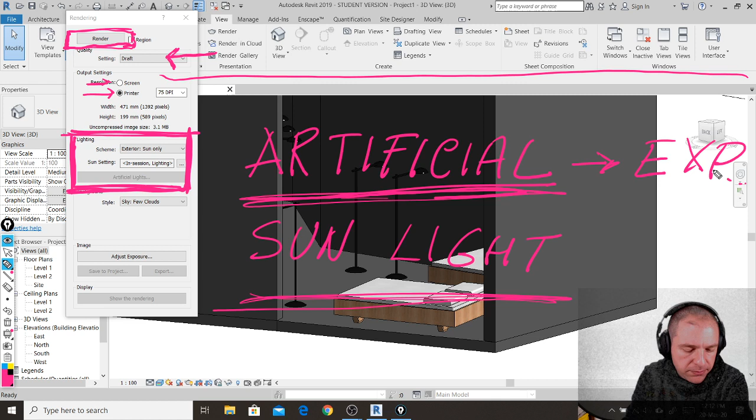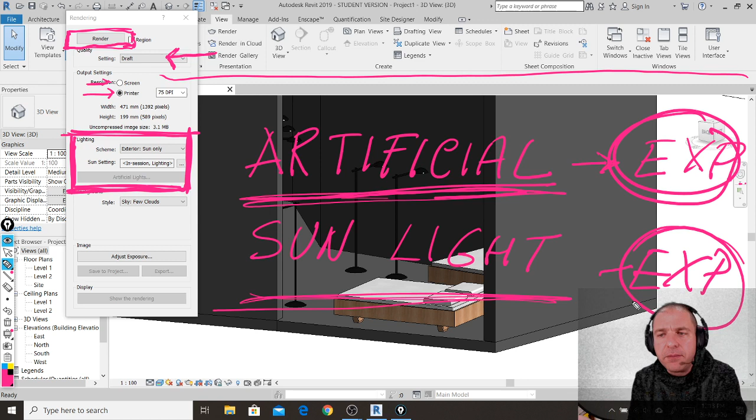When we make renderings, and because all of you have already seen 3ds Max rendering, you know that in 3ds Max you can use artificial or sunlight. But where is the problem? The problem is that each time we use artificial light sources in combination with sunlight, we need to change the exposure value. It's a pretty common problem if you remember using 3ds Max: when you have artificial light, then you put the sunlight, and renderings are super bright. So then you change the exposure, and then you remove sunlight, and suddenly the rendering remains black. And again, it is so annoying, you have to change the exposure again and again. And what is unbelievably complex in 3ds Max is that if you want to use artificial and sunlight together at the same time, it becomes so complex to find the balance between exposure and intensity of light and this and that. It becomes a gigantic mess.

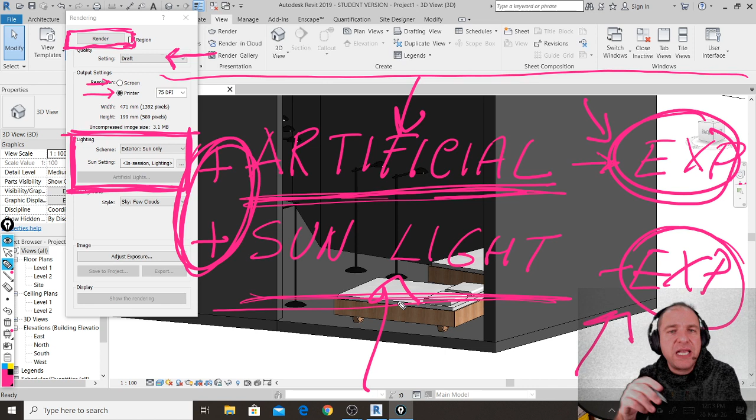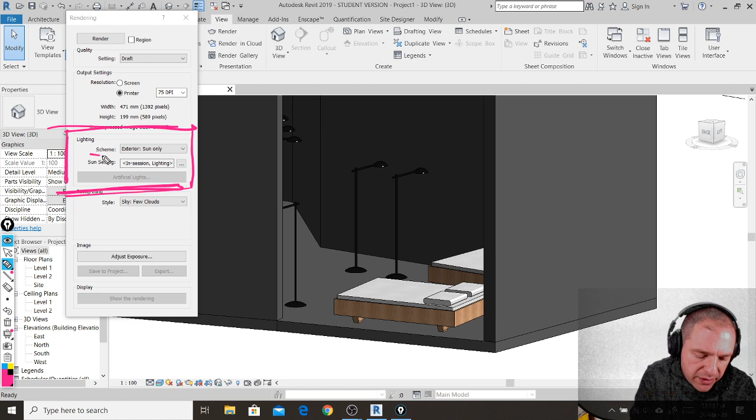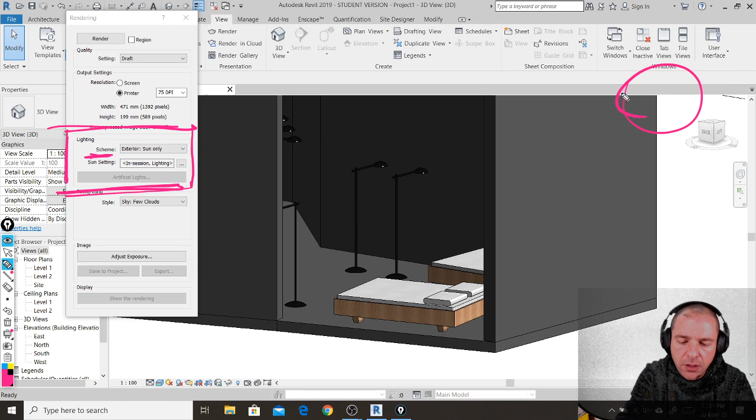So see why instead in Revit, making rendering is not the best, is not the most beautiful quality ever seen, but it is so simple. Because when you see this part here of the menu, and you see this one that is the scheme, you can easily set your lighting scheme in this way. Look, you can say exterior sun only. What this simple parameter means, what this includes in one parameter only, is that in this way my rendering will be by having only sunlight turned on, shining, and the exposure will be correctly set according to this light source. And the exposure will also be correctly set, like I am doing an exterior rendering, so a view from the outside. So first thing first, I can click here and I will find six different combinations of available light sources and exposure adjustments that are preset.

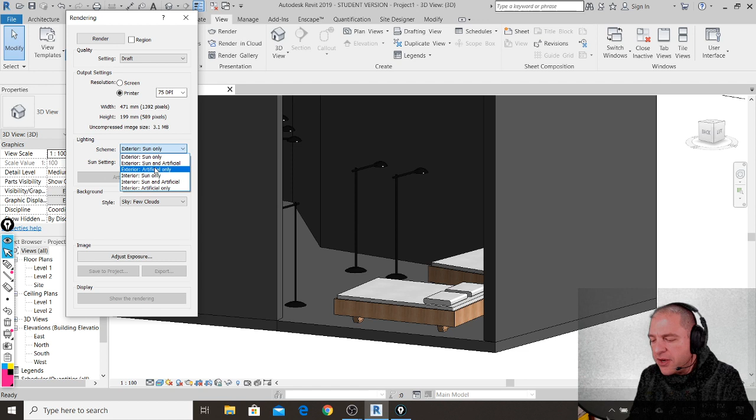So I can use sun only for exterior. Revit will turn on the sun only, it will keep artificial lights turned off, and it will set the exposure for exterior. I can use exterior sun and artificial: if I'm making an exterior scene and I can turn on lights, I can turn on the sun, and Revit will set the exposure for this light combination. As well as, if I choose exterior artificial only, the sun will be turned off and only artificial lights will be turned on, but the exposure will be set for those lights.

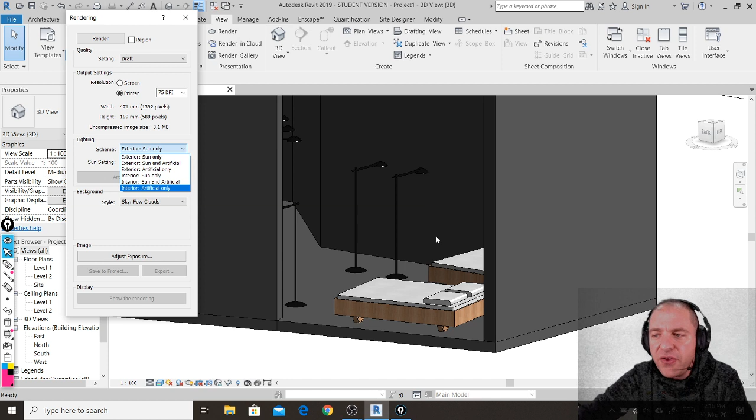And same thing for interior. So I can set exposure for interior, turn on the sun only. Exposure for interior, turn on the sun and artificial. Exposure for interior, and turning on artificial light only. So this is clearly an interior scene. What I will do is just show you that lights are components that have not only a light fixture, but also a light bulb, so the light source.

I will set my lighting scheme to interior, artificial only. I don't want to see the effect of the sun either. So basically this is like making a nighttime rendering. If I click the button now that is called render, hoping that it won't freeze, you should see the rendering of this view, showing that the light fixtures are also projecting light. Let's click render and see what happens.

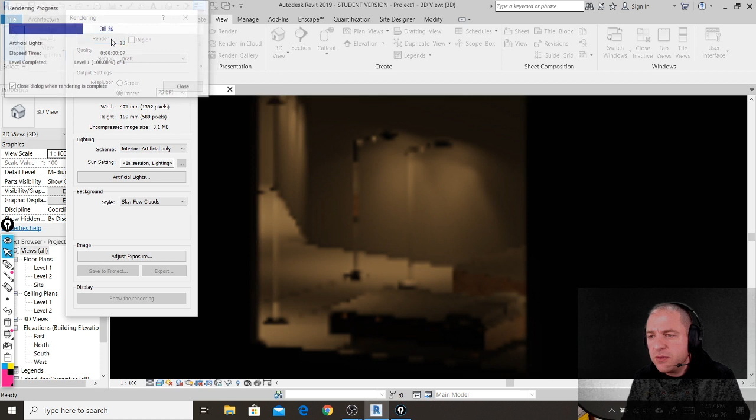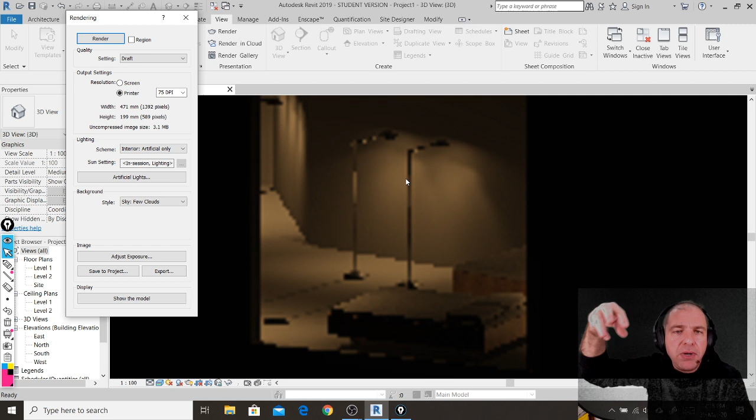Oh, fantastic. Well, it's not that fantastic, simply because I have set my quality to draft just to make a quick preview. But this proves that these lights are not only 3D models, like the block of the light, they also have light projection.

And why is this so important? Look, this is important because, like all other objects in Revit, even components have parameters. But components are a bit more complex to manage simply because they don't always have the same parameters. If I have a bed, it will have certain parameters. If I find a table, it will have other parameters. If I use a chair, it will have other parameters.

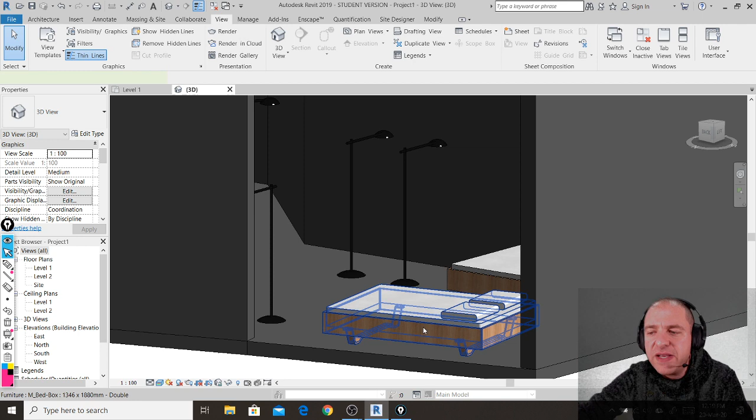Just to show you, if I select a bed and click edit type, I will find certain parameters like materials, dimensions, and then identity data, where basically if I want I can write the brand, the price, and other things. But what's important is that if I click edit type and edit a component that is a light...

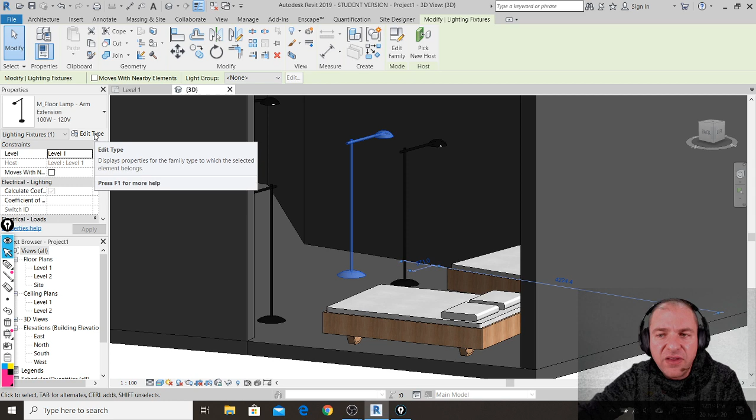In edit type, in all light sources, I will find not only generic parameters like materials and so on, but in all different lights, if I scroll, I will always find, and this is true for all light objects, a specific area of parameters that is called photometrics.

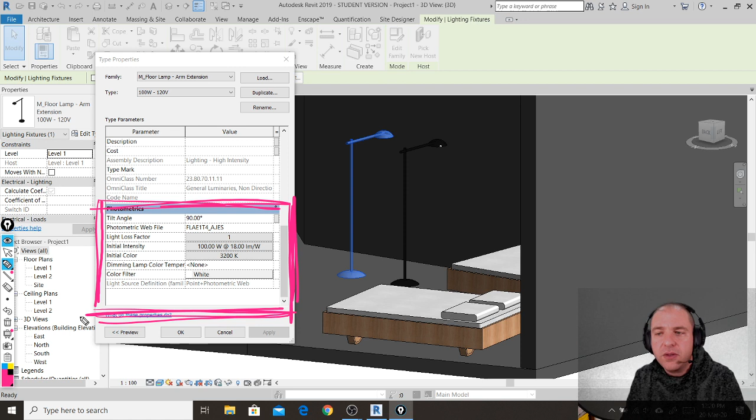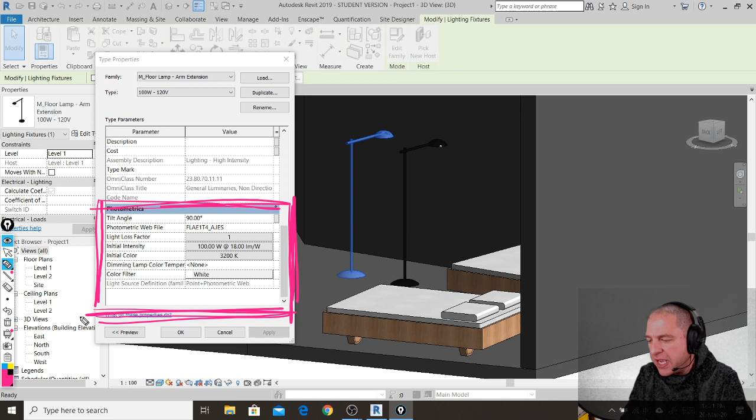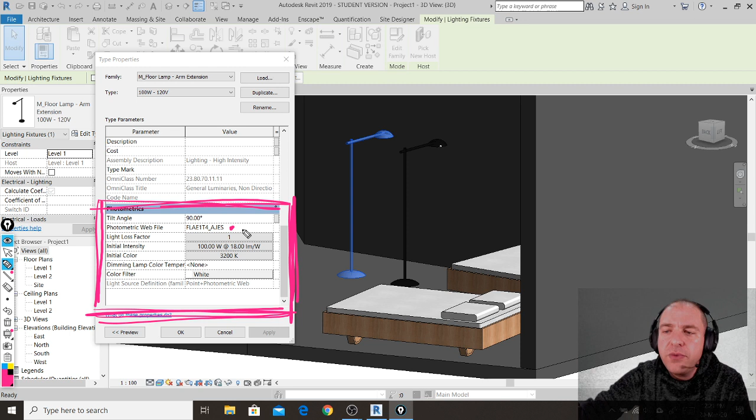And believe it or not, photometrics are exactly the same light parameters that we studied in 3ds Max. So basically, yes, it is an IES file. Each light has an IES file preloaded, and you can find it here. This is the name of the IES file managing this particular light. But not only can you load the IES file, to make your life easier, you can also click these buttons.

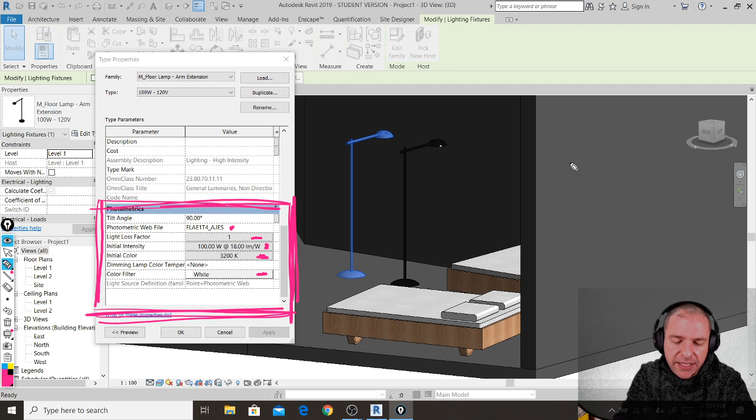Do you remember the parameters of photometric lights we saw in 3ds Max? We mainly saw intensity, and we saw color, and here you can change them as you wish. So my rendering was pretty yellow and also really dark. Why? Simply because the initial parameters of these lamps have very small intensity and a color of 3200 Kelvin, which is a pretty yellowish color.

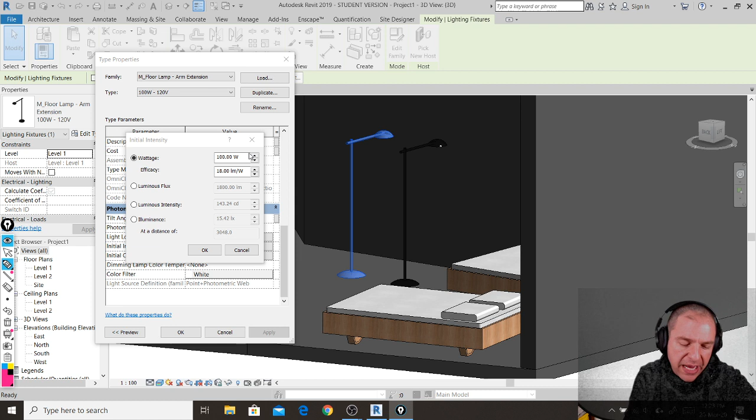So what I will do is click intensity, and I can increase it. And if I'm more familiar with 3ds Max parameters, I can also use 3ds Max units. In 3ds Max, if you remember, we were using not watts, but lumens or candelas. So if I want, I click luminous flux, and let's say I make it, I don't know, 4,000 lumens.

LM is if you know the intensity of light in lumens. CD is if you know the intensity of light in candelas.

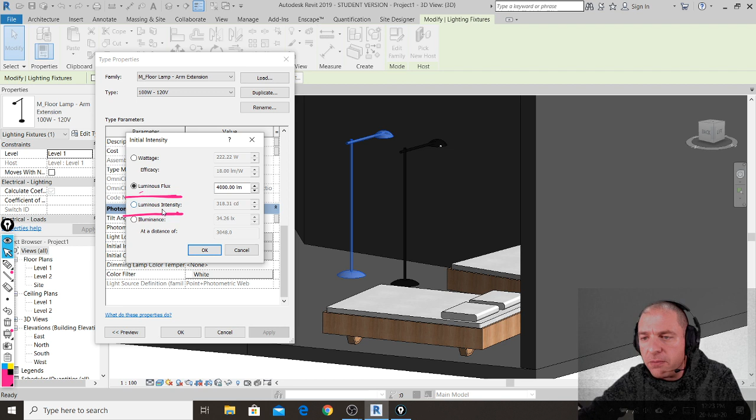Yes, I'm so sorry, I was faster. I've read your message before you were able to delete it.

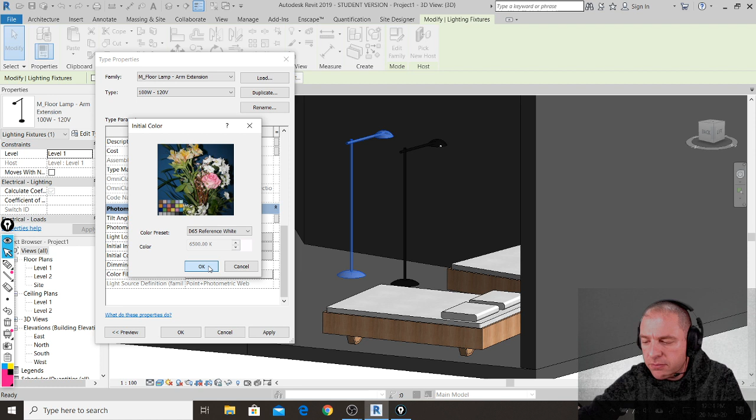And also, we can change the color. So instead of this yellowish tone, I can make it like D65, which would be pure white. Then I click OK.

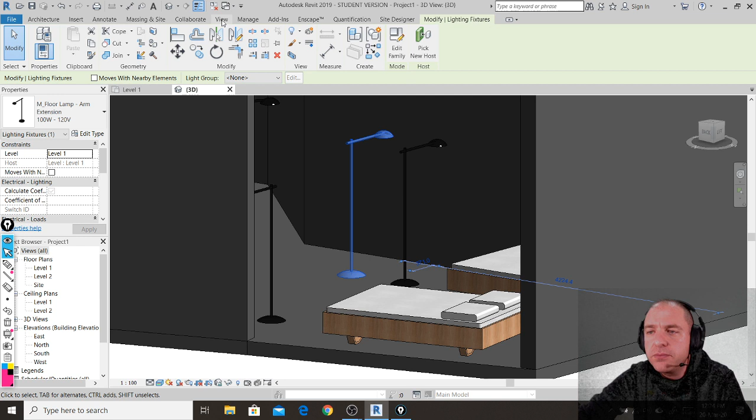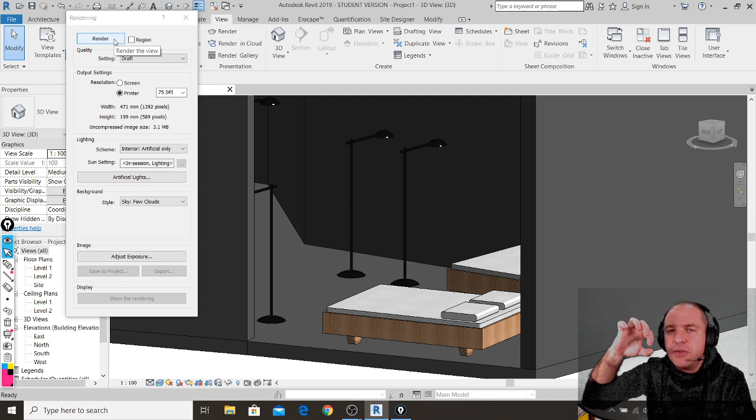Just to check that we can manage lights like we did in 3ds Max, let's see what happens if I go to View, then click Render. As you can see, my render settings are still there, so I don't have to change them each time. But if I click Render, instead of that yellowish, very dark image, I should have a more white and slightly brighter result. Let's see if it's true.

Fantastic. Look at that, that's too cool to be true. Don't mind the quality. It's so pixelated simply because I'm keeping the quality on draft just to avoid waiting minutes to see the result. So the fact that all shapes are not sharp depends only on this.

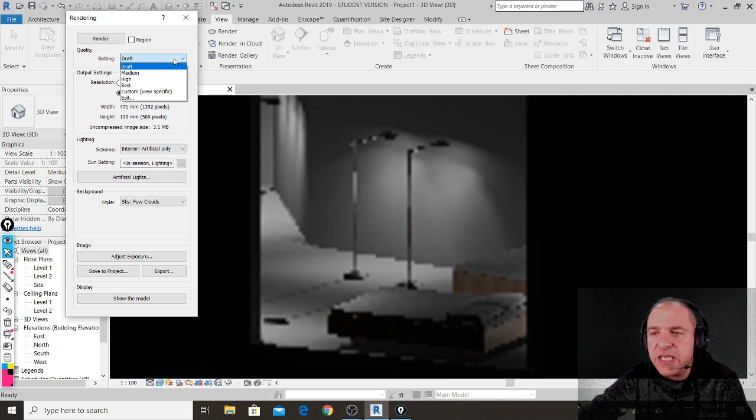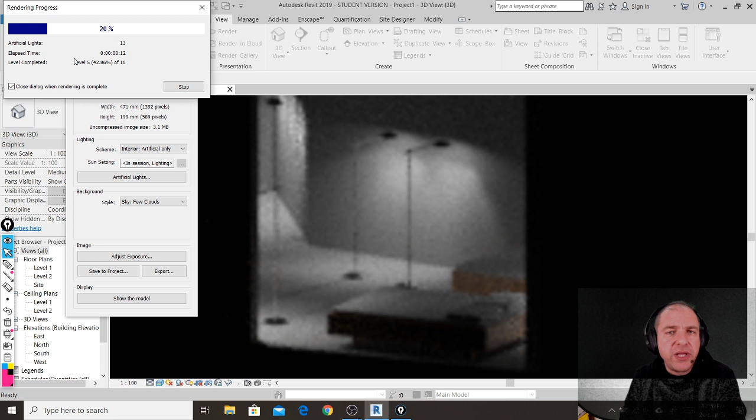If you just want to see, you can go to render high and render again - it takes a little extra time, but you'll see that the rendering is a lot sharper. But this is not the point. I just wanted to show you the final result.

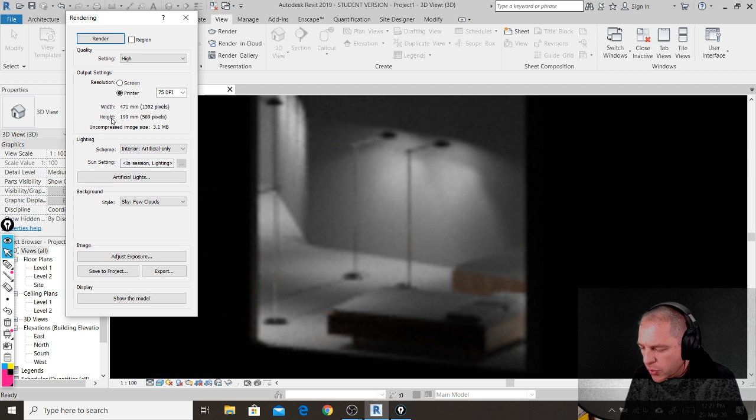For better rendering, you can also use Lumion or other external software. Yes, for sure, you can use many other external rendering engines with Revit. There are some that are better, some that are a little bit more complex.

The difference is how additional render engines are integrated with the software itself. For example, there are two render engines that work really well with Revit. One that I like, but this is just my opinion, is V-Ray. There is V-Ray for Revit, which can be used directly inside the software.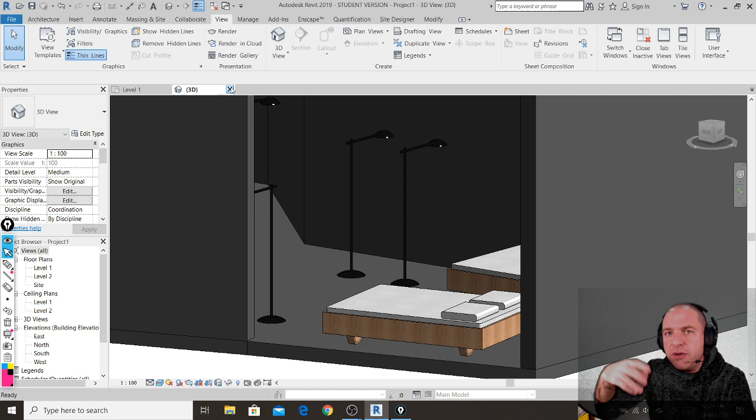One instead that I love is a software that unfortunately I don't think I can show you while I'm live streaming, because I think if I render and live stream, the stream will get stuck. But the software that I personally use to render in Revit is called Enscape.

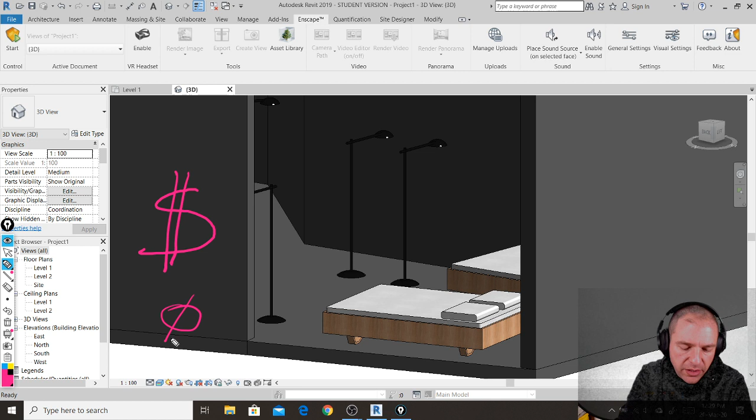Enscape has a lot of interesting aspects, but the one that I love the most, believe it or not, is that the price of Enscape is zero. And if you are a student, you can obtain a fully working license of Enscape, for free, 100% for free.

This is not a sponsored message. I just tried it by myself. I love it.

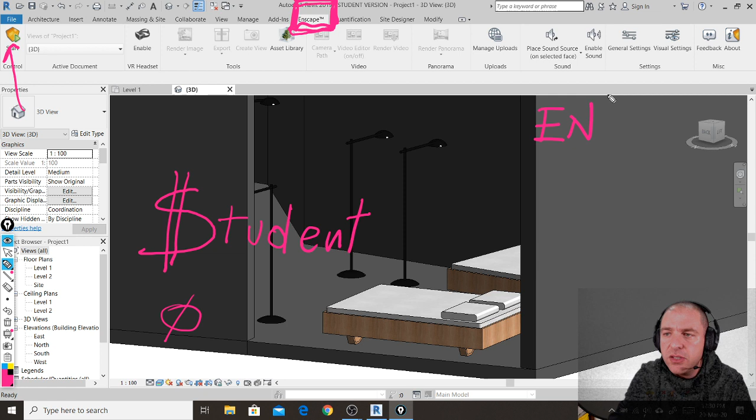And Enscape is a real-time ray trace renderer. So really, in real time, you push this button and it renders. It basically turns Revit into a gigantic video game. If you are interested in using Revit in a more professional way, I highly recommend checking out this software, called Enscape, that is 100% fully integrated with Revit.

But after showing the lesson with materials, I will try instead to record a video offline, and then I will put it into the channel where I show you how to use it. I can't use it while I'm live streaming, but it would be great.

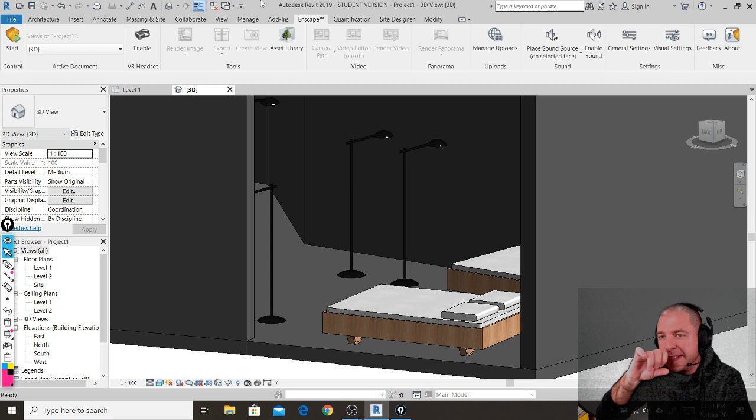Let me show you the last couple of things about components. I haven't forgotten - one of your classmates asked something about the ceiling, so I have to answer that question too. But let's finish with components today. This is the last thing I want to show you.

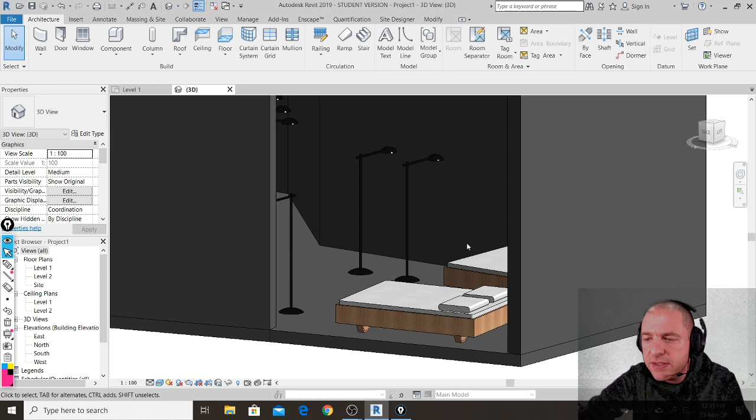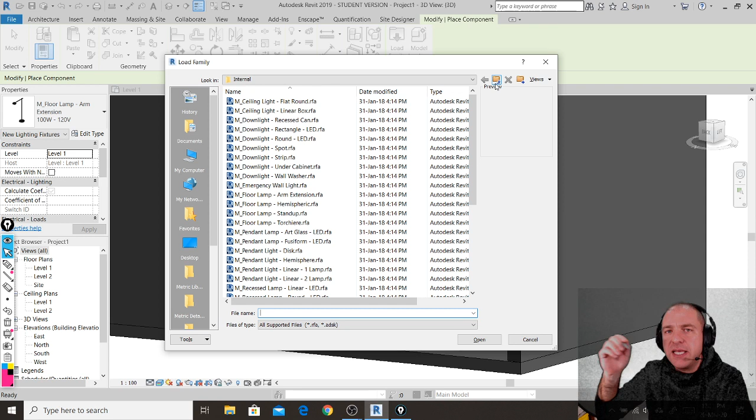When we use component and click load family, we need to understand that the process of placing an object inside Revit this way is simply that we select a file and we put this inside our project.

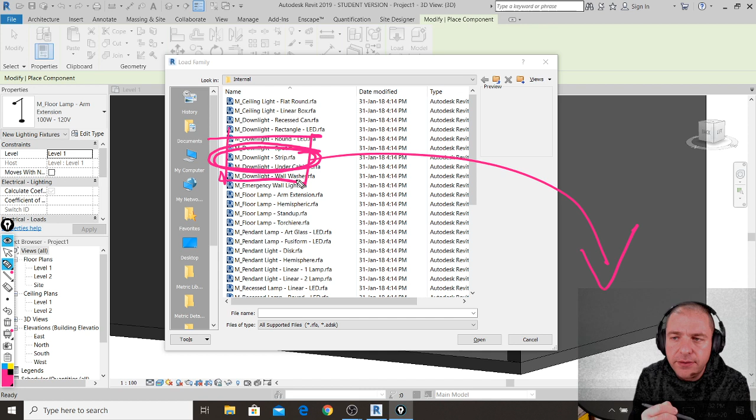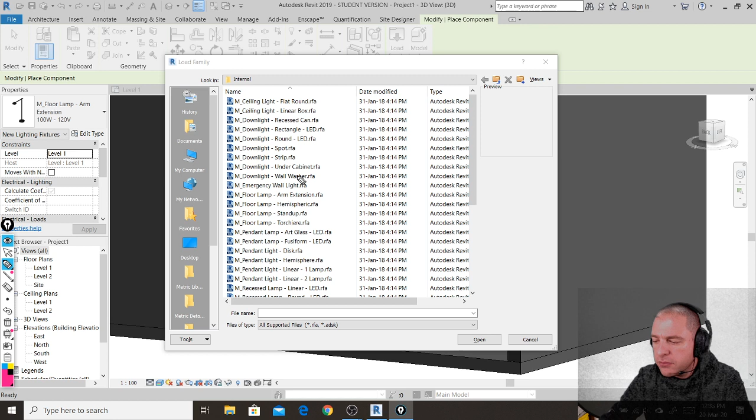And why is this so important? This is important for two main aspects. Aspect number one is if we want to work with another person - if we need to share the project with someone else, we need to be sure that person has the same library objects.

Because if not, we give our file to someone else, they open it, and boom - they just find a room with walls, and everything else will remain empty.

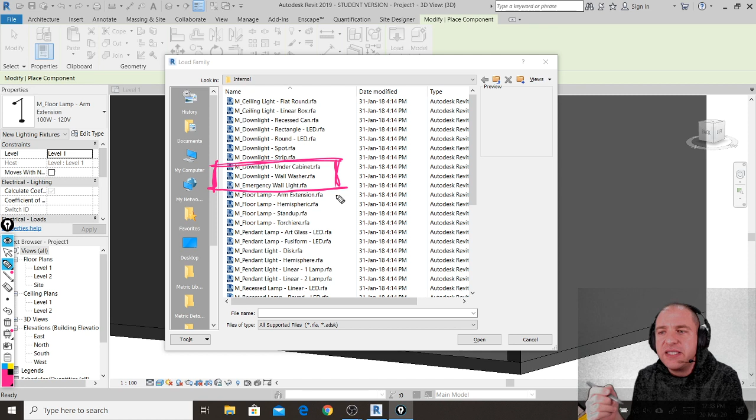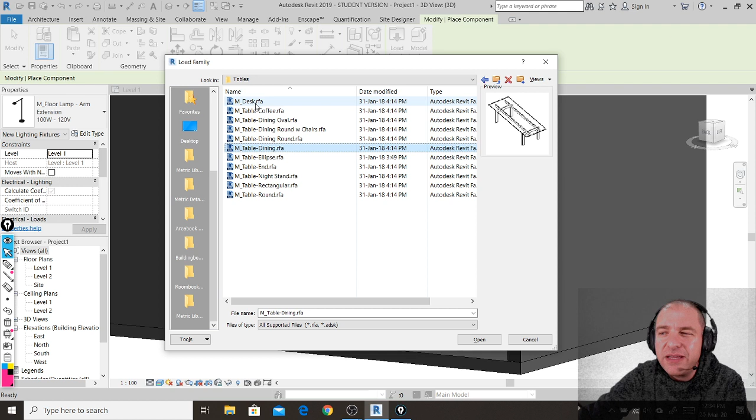Another reason this is important to know is this: you may notice, especially for furniture, that the choices we have inside our library are not that many - they're a little bit poor. There are just a few examples, a few tables to choose from, and the selection isn't that great.

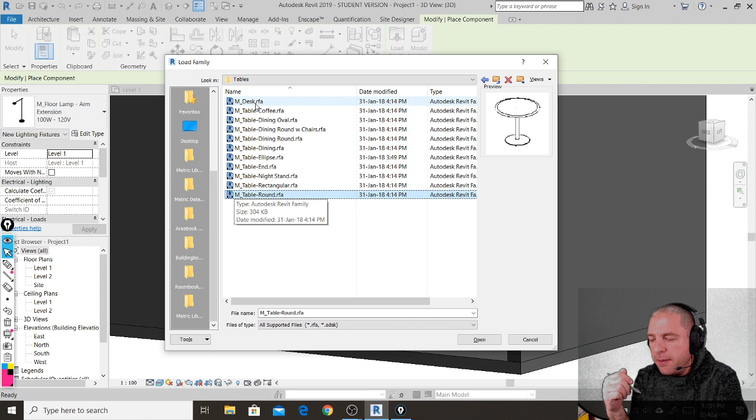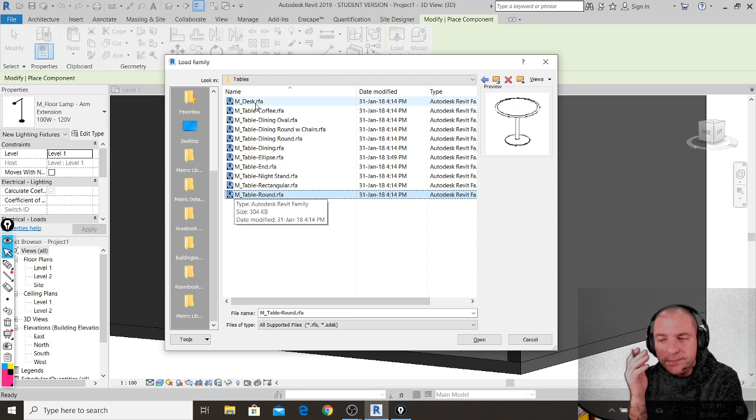So what we can do is basically this - I'll answer questions I missed in the chat after. We can browse the web and download additional Revit families. So we can download additional components, but we need to follow one simple rule that I'll show you in a second. But first, which kind of websites can we use?

The beautiful thing is that we can't use the same websites we were using with 3ds Max - so we can't use 3ds models. We need to use families and objects that are specifically created for Revit. One of the most famous, most popular websites that contains a lot of Revit resources is called Revit City.

It has a very ugly interface. It is terrible, but it has a lot of components. The only downside is, let's see if I can load it.

It is Revit City. It is for free, but it will ask you to join this website, so you have just to make a free account. Nothing crazy, nothing impossible, but just that they want you to give them a couple of information.

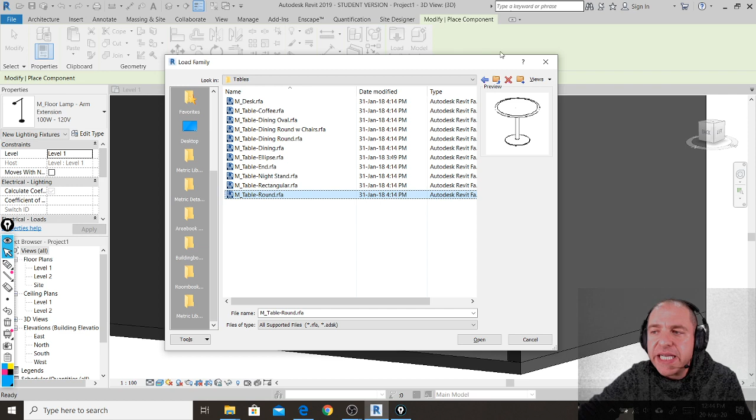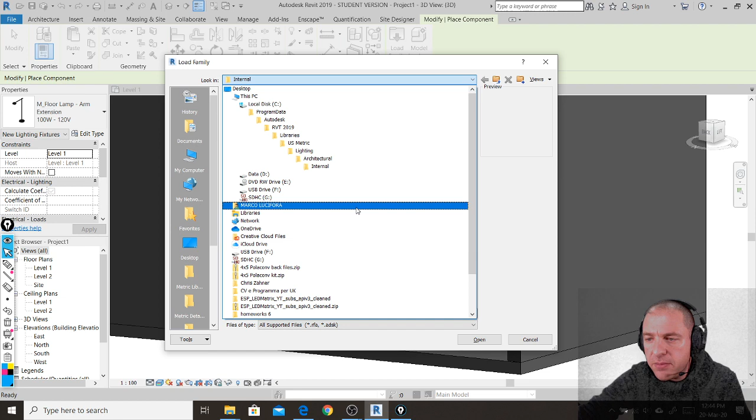Look, if I click component, and then I click load family, to use that downloaded chair, I need to go inside my name, downloads, this weird folder here, and finally I will find this chair that I have downloaded.

So I can use it, I can open it, and first of all, I will see that this is a family. So it is not one single object, but I can choose if I want to load the no upholstery version or the one that has the upholstery seating.

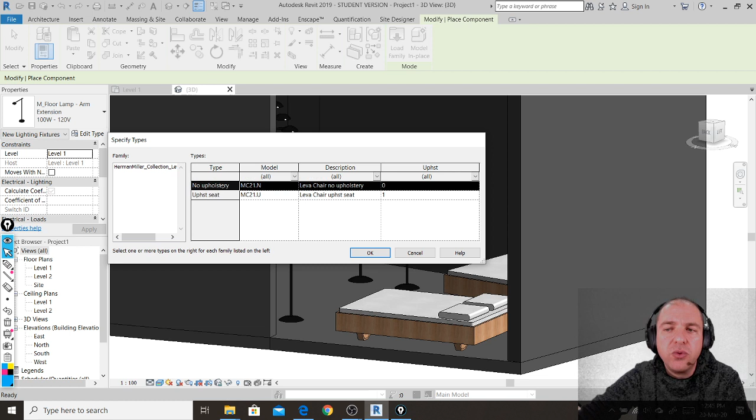And I can left click to choose if I want to load one or the other, or if I hold Control, I can load both objects of this family inside my project. And I will click OK.

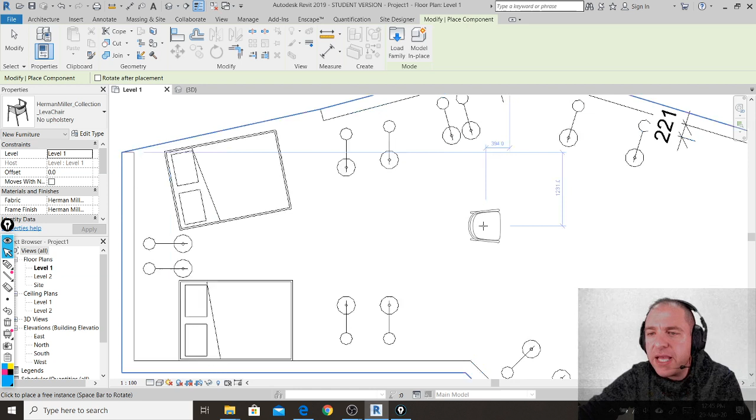And now I can place this chair wherever I want. Even if it is downloaded, spacebar works the same. So if I move here, I will have all these chairs.

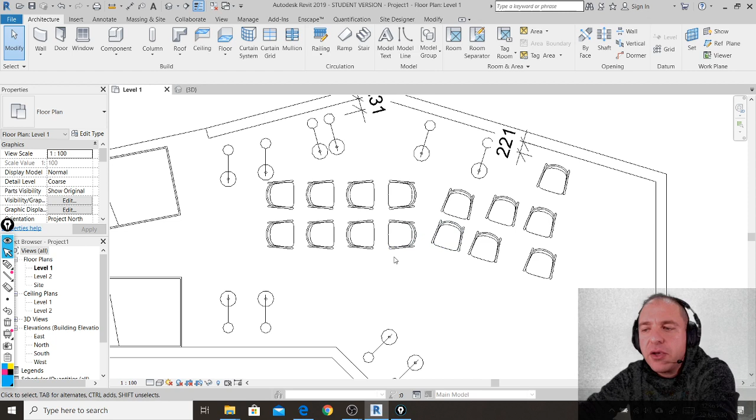Where is the only problem, the only aspect that I have to remember? Now, in my computer, if I go to the 3D view, I will show you how pretty these chairs are. Oh, they perfectly work. But let's delete this wall. Oh, look at that.

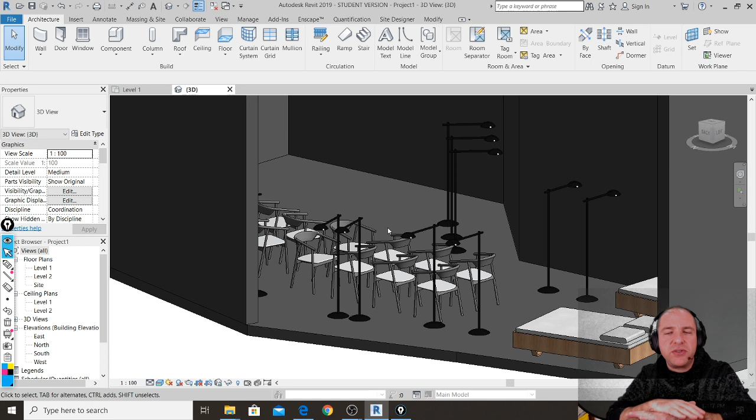So where is the only problem? The only problem is here. If one day I have this brilliant idea to go to my download folder and I discover I have 13 gigabytes of junk files, and I start decluttering my downloads folder, deleting files I think I'm not using, moving files from downloads to my USB stick or my D drive, and so on. If I change the position of my downloaded chair, I will discover that if I reopen the Revit file, all chairs in this project will disappear, because they are not modeled inside this file, they are just linked to this file.

So it is a good suggestion, something that works in reality: if you start downloading Revit files, I personally suggest placing them in a folder that you're not going to delete, remove, or rename in any way. First place the model in your personal folder that you're going to use forever, and then load the family inside Revit. This way, you will never have issues in your projects. But if you just download and use it repeatedly, and then change your download folder, it will be a gigantic disaster.

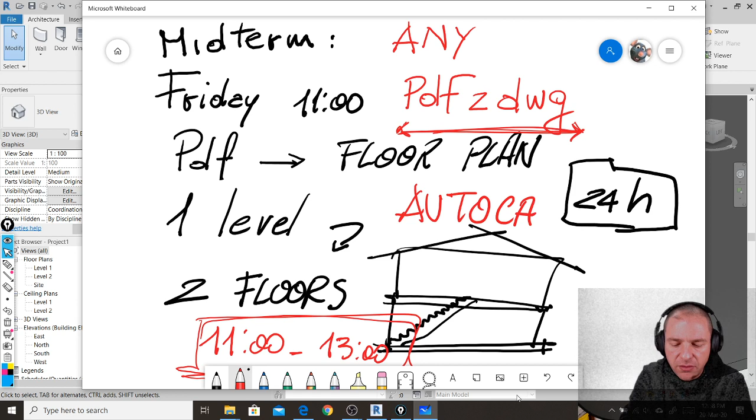In the meantime, if you want to make just practice, go to the Google Drive, go to Marco, then go to the AutoCAD folder. Inside that folder, in my Google Drive, you can find all my previous AutoCAD midterm examples, and you can make practice using those PDF files if you want to be super prepared for next Friday. Okay?

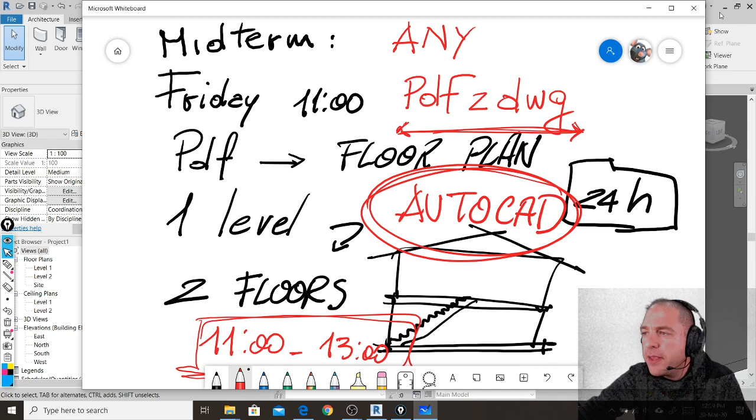Let me see the chat. Okay, so there is a lot of delay between when I speak and when you see me on the screen. That is terrible. Anyway, let's see if I can.

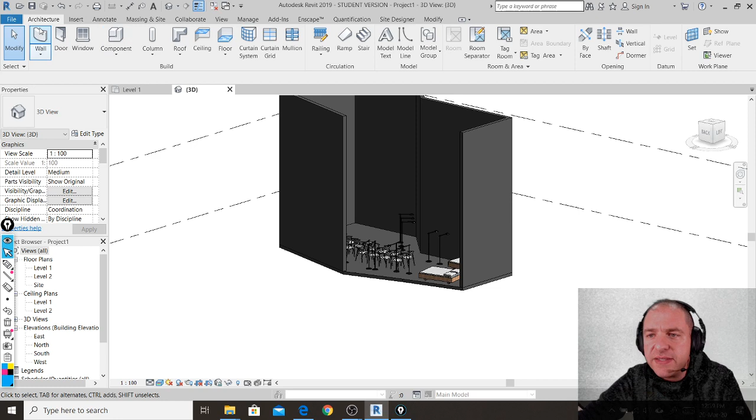The chat says that in the previous live, someone asked about the ceiling. So let's see if I can do it now. There is this, basically.

Let's say if you have inner walls like this, and I want to make a ceiling on my second level, I go to level 2, click floor, and pick walls. Now I have to pick them because I have too many walls, and then I will close this.

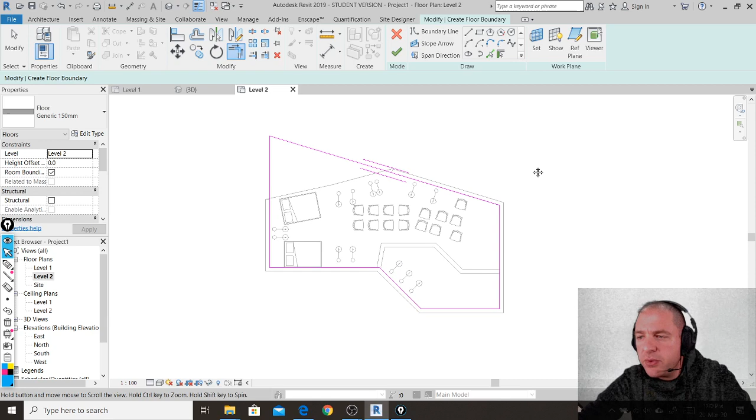Oh, why not? What a beautiful shape. Perfect, so I click OK. Then when I make this floor, Revit will ask me if I want to cut these walls, and I click yes.

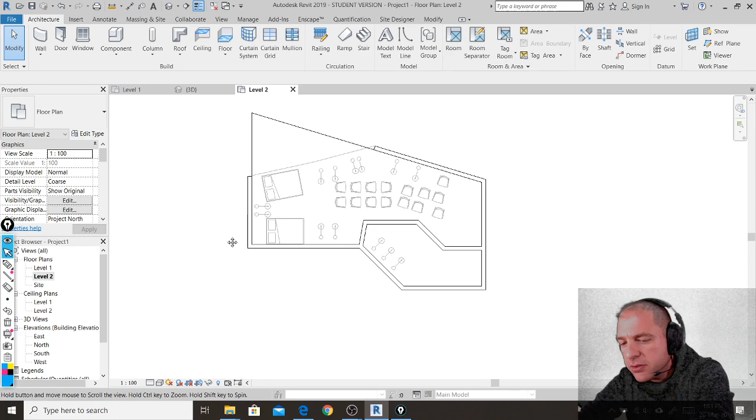Overlapping volume. So if I check, when I go to 3D and go to hidden lines, I will see this: my walls are perfectly working here, but these walls are not—they are basically crossing the floor.

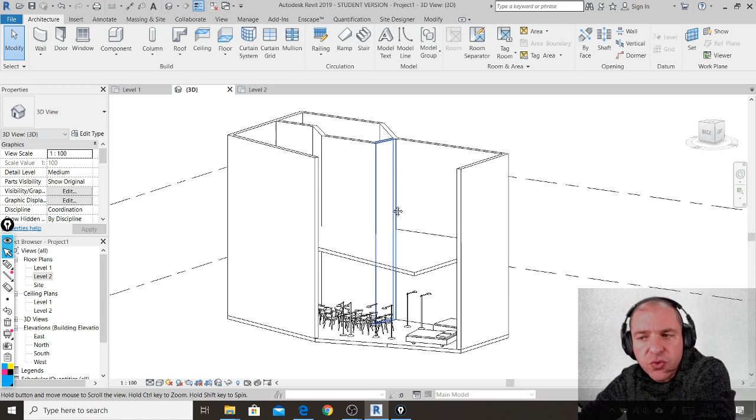So what you can do here to solve this problem, let's see if we can solve it in two ways. Way number one: if you need these walls to go from level 1 till here, and you don't want these to go upstairs, this is option number one.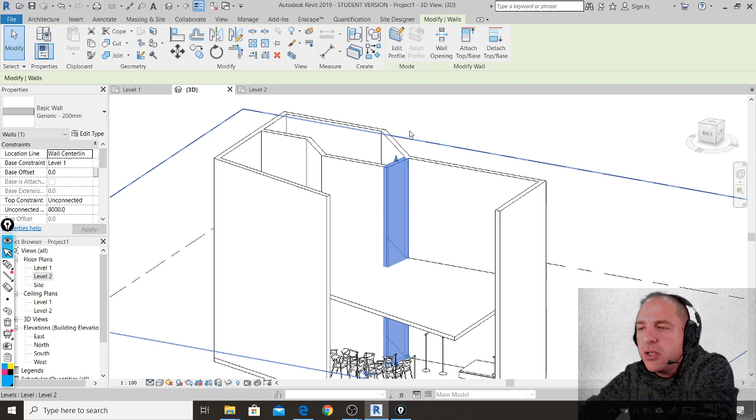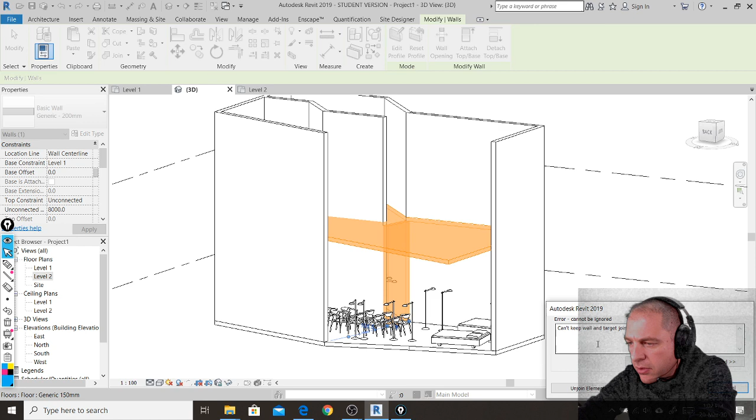You can select the wall, attach the top, and click the floor. So I will unjoin—let's do it again. Can't keep... why? It was very nice.

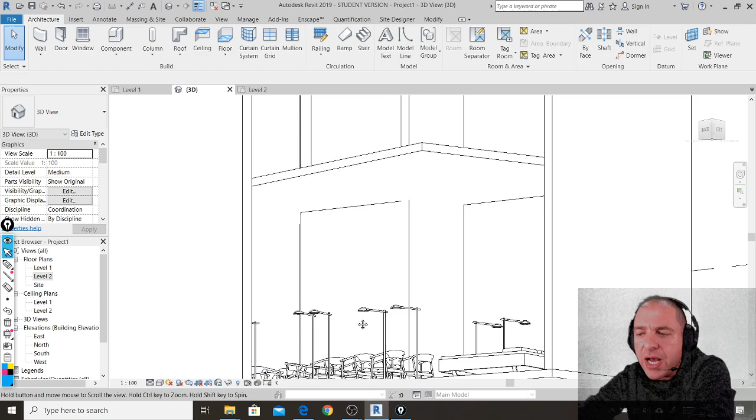No, let's do it this way: attach, select. Okay, I don't know why that wall doesn't like it. But this is option number one, if I just need the wall to go from level 1 till this ceiling here.

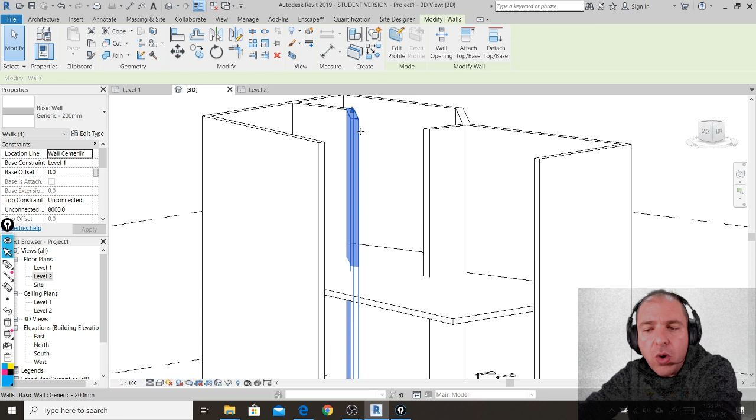But sometimes this is not the case, because sometimes maybe we have two floors with the same exact inner wall subdivision, so I need to keep walls above and below. I just don't like that my wall and floor are overlapping—let's see if I can fix it in a second. If not, this requires a longer explanation.

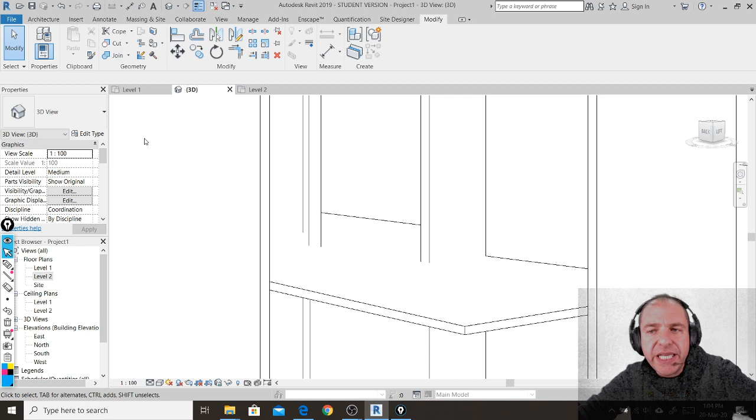What I can try to do here is something I forgot to explain in class—let's see if I can use this simple tool called join. So I click join, then select the wall and the floor, and boom, they simply work.

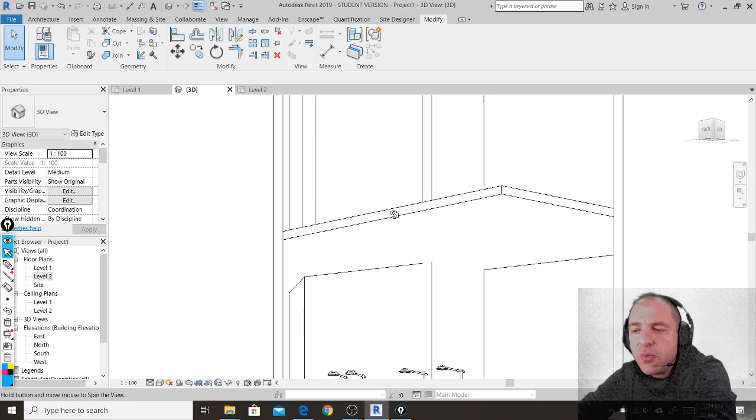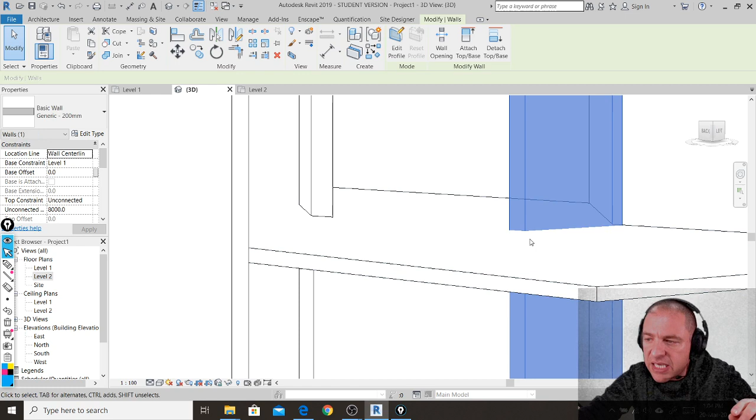In this way, the lower part of the wall stops underneath the ceiling, and the upper part of the wall starts above the ceiling, but I was able to remove this intersection that goes through the floor just by using this simple tool called join.

Okay, was this the question? Oh, also there is the video that shows the same thing. Fantastic.

Lovely, perfect. So this basically ends today's video, today's lesson.